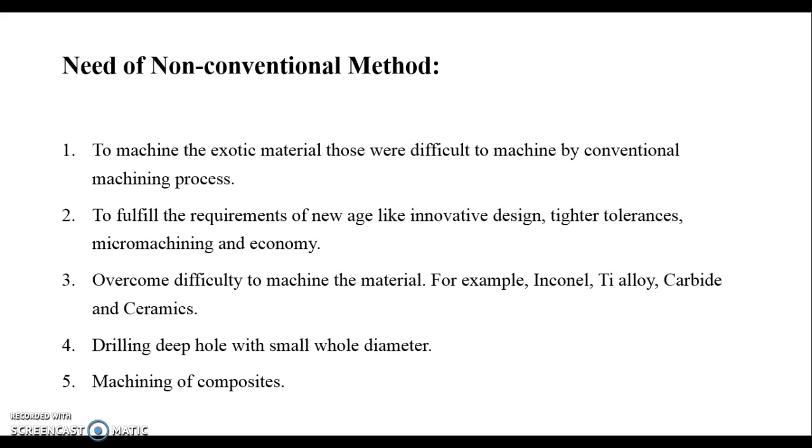Need of non-conventional methods: to machine exotic materials that were difficult to machine by conventional machining processes. To fulfill the requirements of the new age, like innovative design, tighter tolerance, micro machining and economy. To overcome difficulty in machining materials, for example Inconel, titanium alloy, carbide and ceramics. Drilling deep holes with a small hole diameter, machining of composites. There are certain classifications of non-conventional methods.

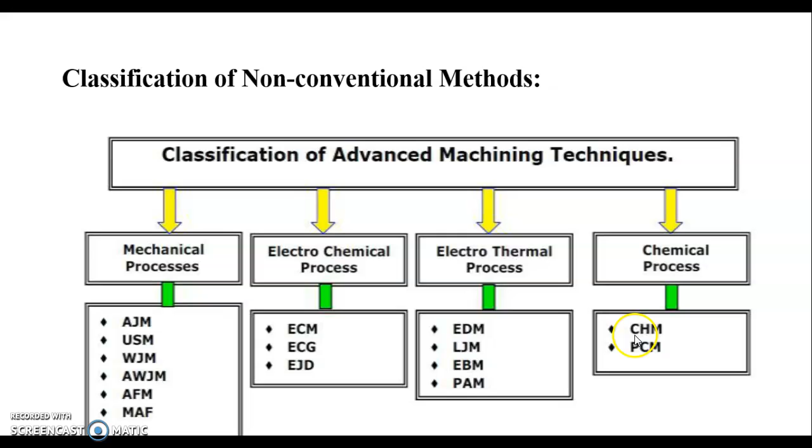First, mechanical process. Under mechanical process there are different non-conventional machining processes: abrasive jet machining, ultrasonic machining, WJM, that is water jet machining, abrasive water jet machining, AFM, MAF. Then under the category of electrochemical process, electrochemical machining, electrochemical grinding, then EJD. Then under electrothermal process, electro discharge machining, LBM, EBM, then plasma arc machining. And fourth, under chemical process, CHM and PCM.

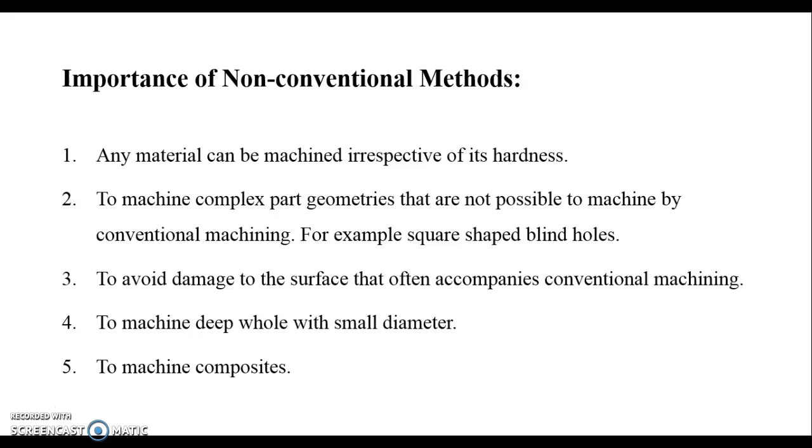So, importance of non-conventional methods. Any material can be machined irrespective of its hardness. To machine complex part geometries that are not possible by conventional machining, for example square shaped blind holes. To avoid damage to the surface that often accompanies conventional machining, to machine deep holes with a small diameter, to machine composites.

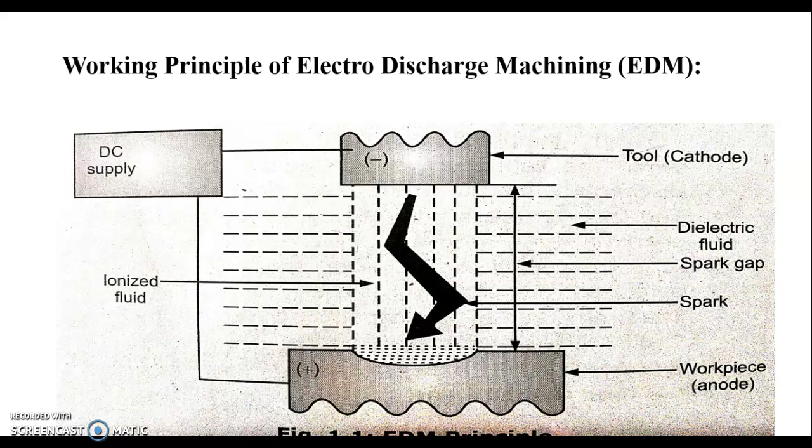When the supply is switched on, thousands of sparks are produced per second. The duration of each spark is very short. When the spark comes in contact with the dielectric fluid in the spark gap, the fluid gets ionized. It allows current to flow between tool and workpiece. A very high temperature, near about 10,000 degrees Celsius, is generated in the spark region. As a result, the material gets melted and is removed from the workpiece. These melted particles of metal are driven away by the dielectric fluid.

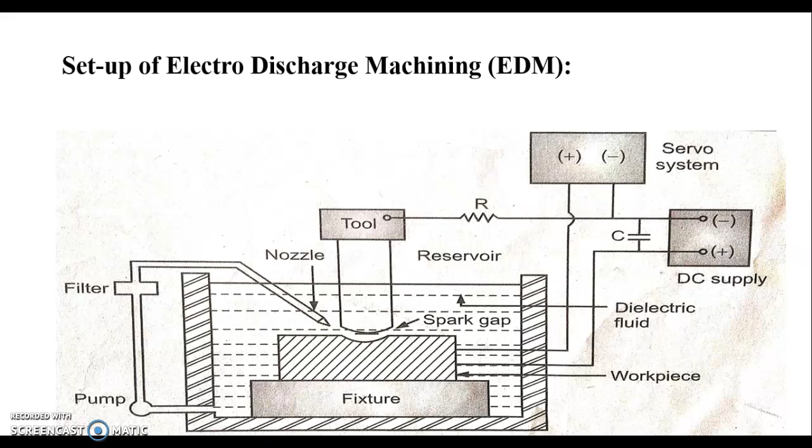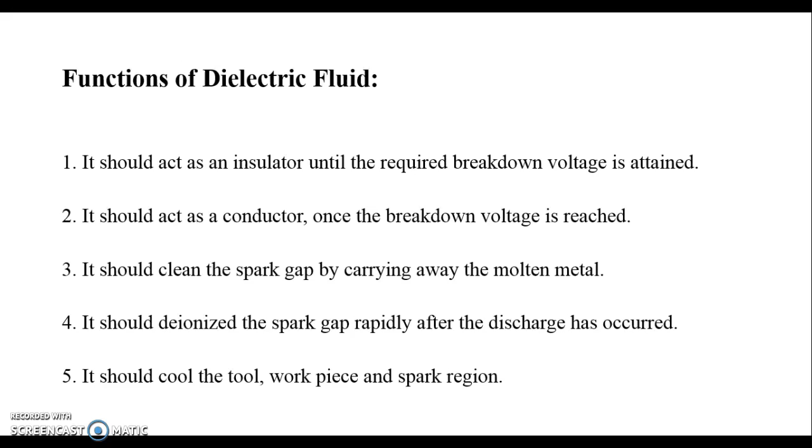Next is the function of dielectric fluid. It should act as an insulator until the required breakdown voltage is attained. It should act as a conductor once the breakdown voltage is reached. It should clean the spark gap by carrying away the molten metal. It should deionize the spark gap rapidly after the discharge has occurred. It should cool the tool, workpiece and spark region.

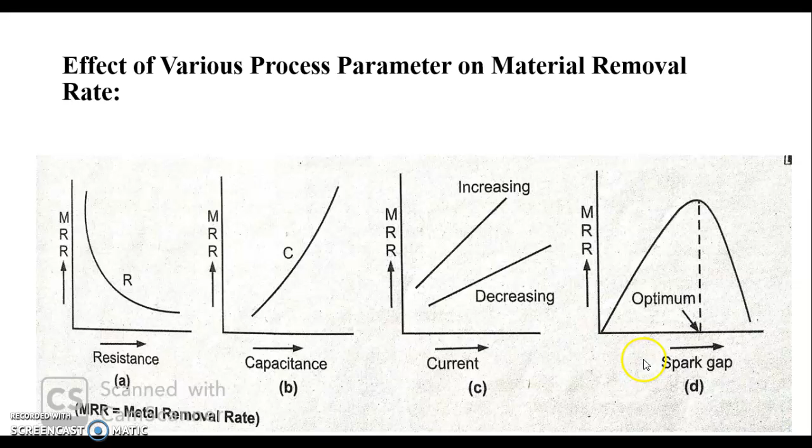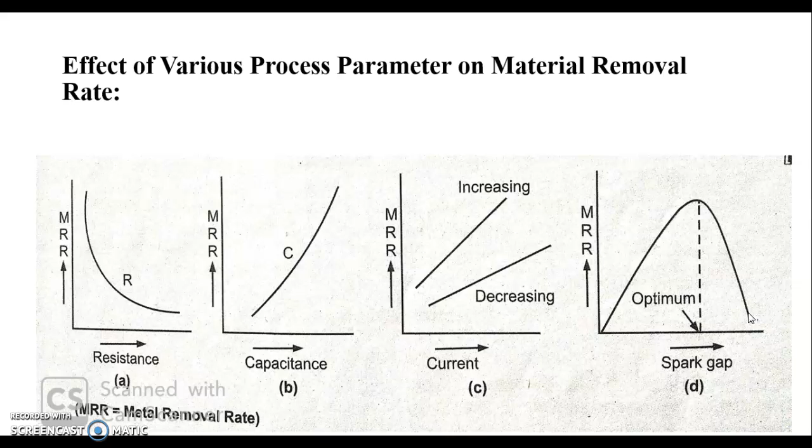In diagram C, the graph shows MRR versus current. As the current increases, the material removal rate also increases. In graph D, it is material removal rate versus spark gap. Here, up to a particular point, the optimum point, as we increase the spark gap between the tool and workpiece, material gets removed. But when the gap is more than 0.5 mm between the tool and workpiece, the material removal rate decreases. So these are the process parameters which affect the material removal rate.

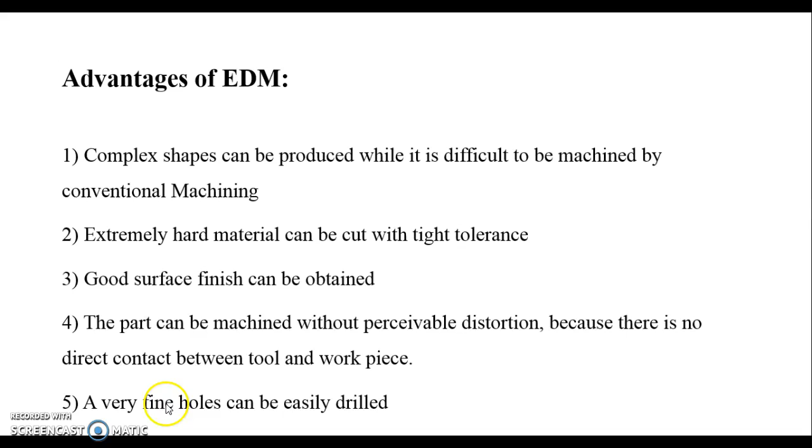Then there are some advantages of electric discharge machining. Complex shapes can be produced which are difficult to machine by conventional machining. Extremely hard material can be cut with tight tolerance. Good surface finish can be obtained. The part can be machined without perceivable distortion because there is no direct contact between the tool and workpiece. Fifth, very fine holes can be easily drilled.

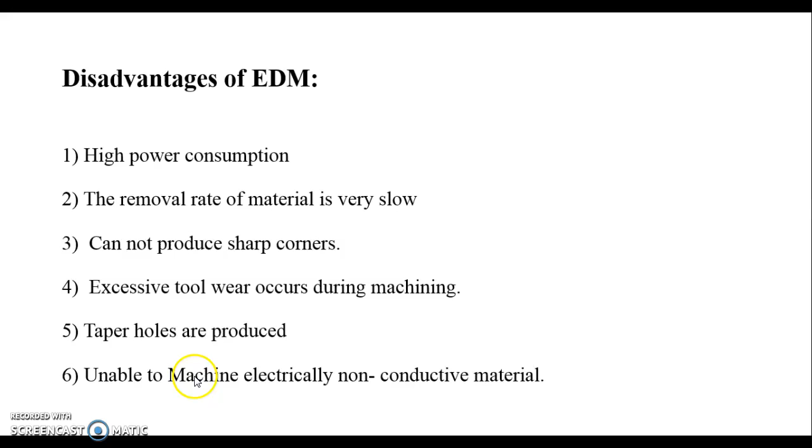There are some disadvantages of EDM: high power consumption, the material removal rate is very slow, it cannot produce sharp corners, excessive tool wear occurs during machining, tapered holes are produced, and it is unable to machine electrically non-conductive material.

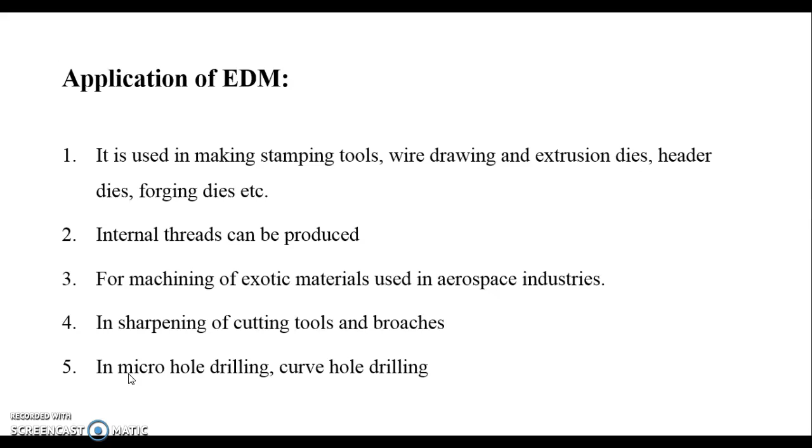Then there are some applications of electro discharge machining. It is used in making stamping tools, wire drawing and extrusion dies, header dies, forging dies, etc. By using the EDM process, internal threads can also be produced. It is used for machining exotic materials in aerospace industries, in sharpening of cutting tools and broaches, in micro hole drilling and curve hole drilling. Thank you.